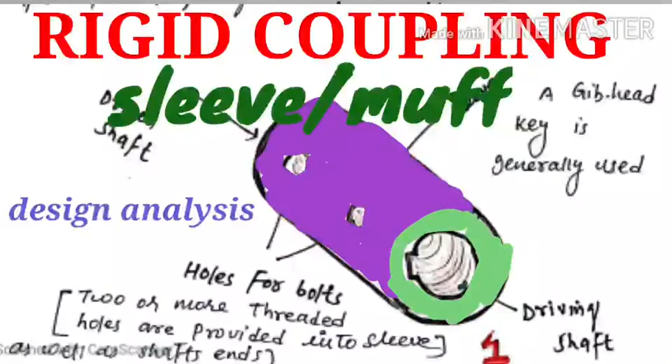Welcome everyone, I am Sanju Ganjir, and today we will learn about rigid coupling and a type of sleeve and muff coupling.

So, continuing, there are three types of rigid coupling.

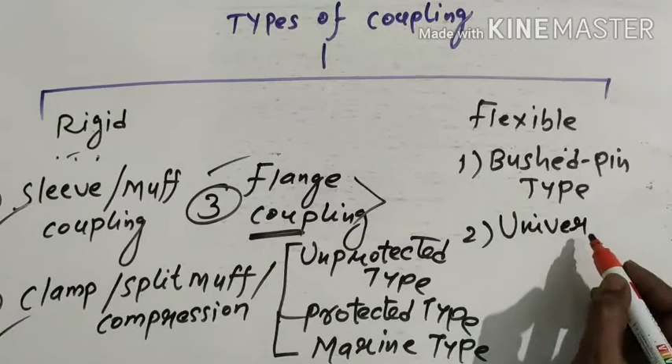You can know about this type of coupling, universal coupling, which connects two shafts that have angular misalignment. This one is very important.

And the third one is Oldham coupling. So all these couplings are discussed here point by point.

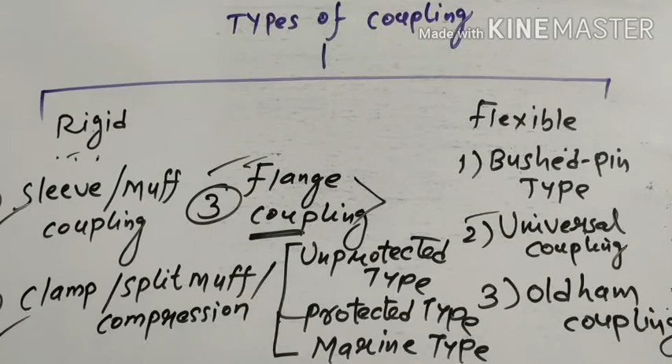So now we first start to discuss the sleeve or muff coupling. Right now we start the discussion of sleeve, or you can say it's a muff coupling. So how does it look? Before starting this, I'll explain it with a diagram. So it looks like this.

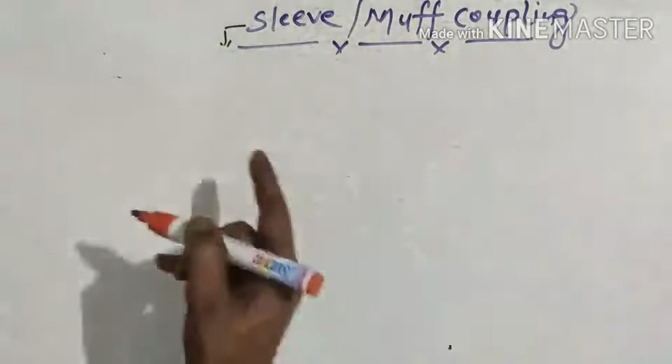Sleeve is nothing but a hollow cylindrical piece of cast iron. It is generally a hollow cylinder or pipe. What is the meaning of sleeve? So first I draw a diagram.

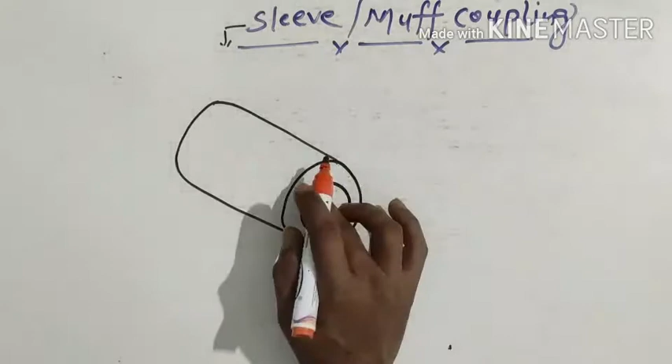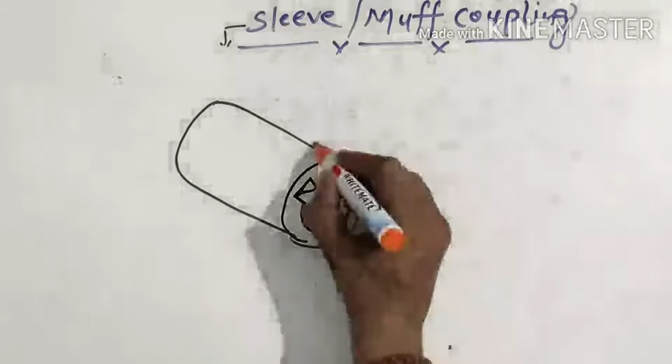Like this. This is a sleeve, and it has an internal diameter which is exactly the same as the diameter of the shaft. It also has a keyway, which is this one. So now this is your sleeve, and the sleeve is nothing but a hollow cylinder or pipe. It is called a muff or sleeve, and it is generally a piece of cast iron.

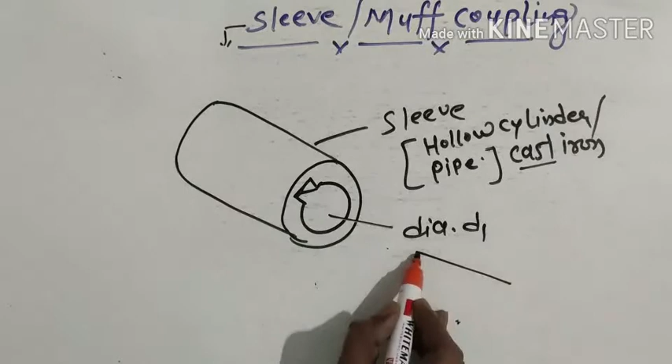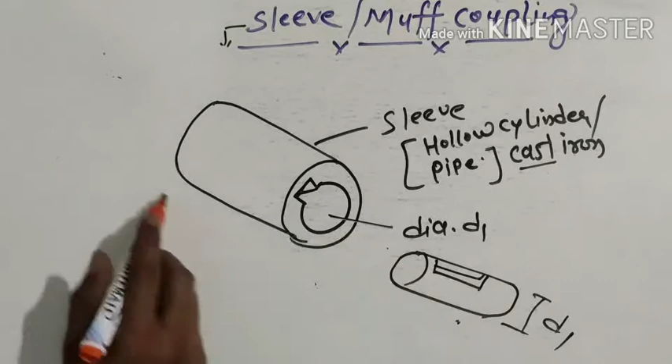So the material used for the construction of the sleeve is cast iron. Now this hollow cylinder has the same diameter, say d1, and if we introduce the shaft like this, then the diameter of the shaft is also d1, and it has a keyway also for this side, so no need to talk more detail about this.

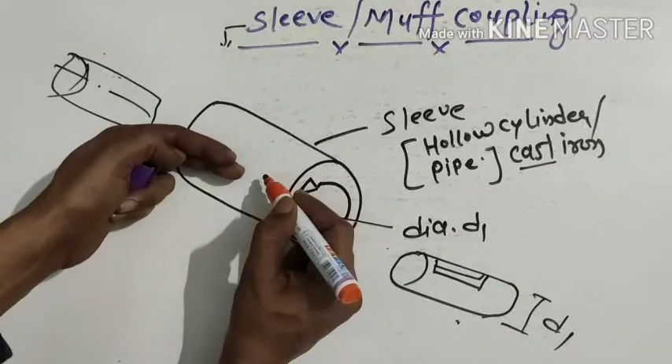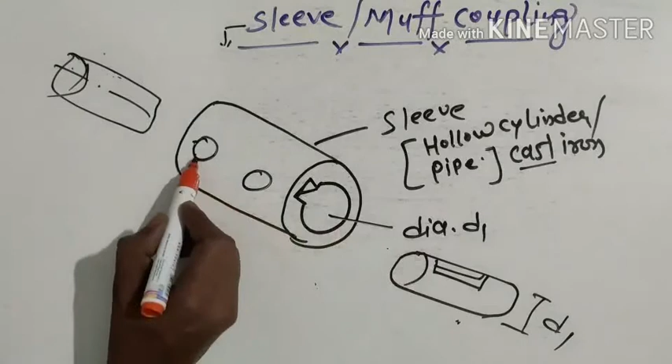Now it fits or inserts here, and it has holes for the bolts, because there should be no looseness between the connection of the shafts. For this reason we provide threaded holes into the sleeve as well as the shaft ends, which helps to tightly fit the shafts together.

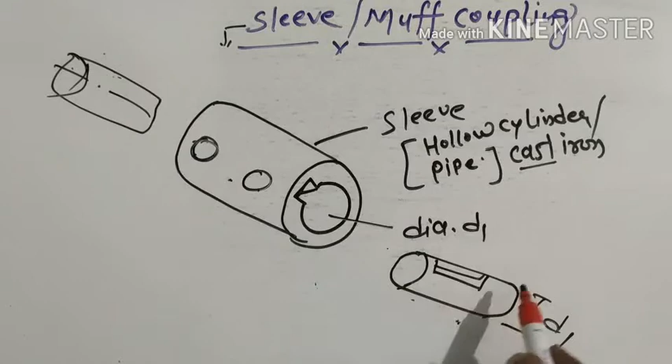One thing to keep in mind when we manufacture the sleeve is that the diameter of the shaft should be such that it perfectly fits into the sleeve. Since many kinds of shafts are available, the sleeve is also easily available in the market, so for ordinary or moderate power or motion transmission, we can use a sleeve. This internal diameter of the hollow sleeve or pipe is exactly the same as that of the shaft.

Generally two or more threaded holes are provided into the sleeve as well as the shaft ends. Now why do we use threaded holes?

We use them because it restricts the longitudinal movement of the shaft and sleeve when the bolts are inserted into them. So some kind of longitudinal movement occurs during this type of coupling, and the threaded holes are provided to prevent that generated longitudinal movement.

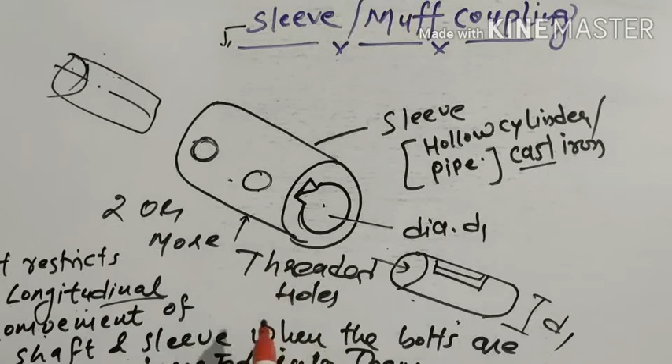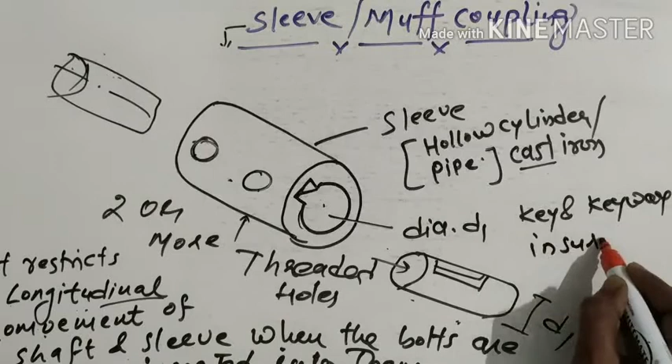And a keyway and key ensure that the shaft and sleeve don't slip. So the key and keyway ensure there is no slip between the shaft and sleeve.

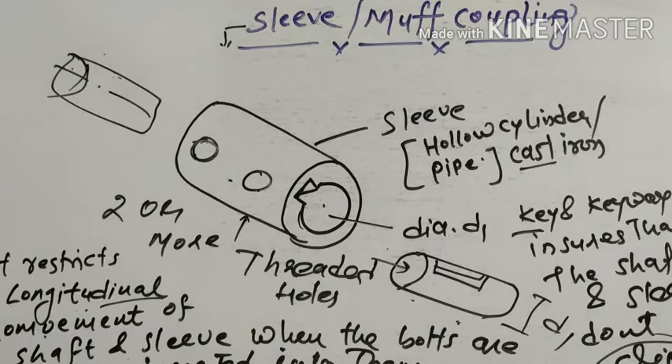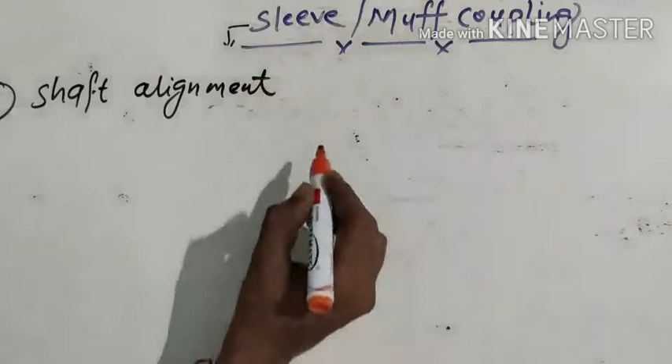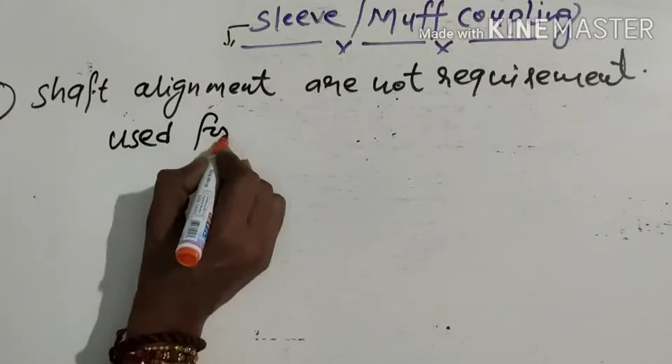Now where are they used? They are widely used where shaft alignment is not required. So this is the application of sleeve and muff coupling, and again it is used for light to medium duty.

Okay, now what is the proportion of sleeve coupling? All the detail is discussed here, so continue with me. I will show you the front view of this arrangement.

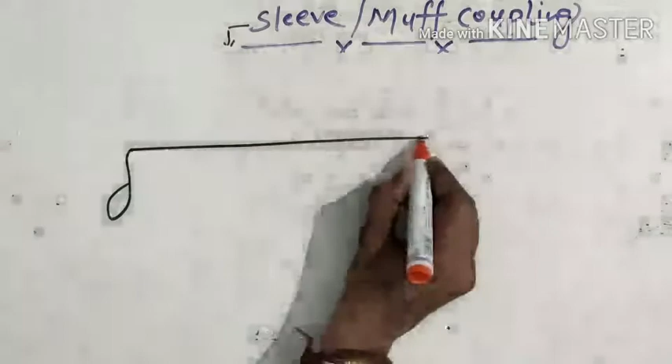So here, suppose this is your shaft, like this, and this one is your center line. Now this is your shaft, and the diameter of the shaft is say d.

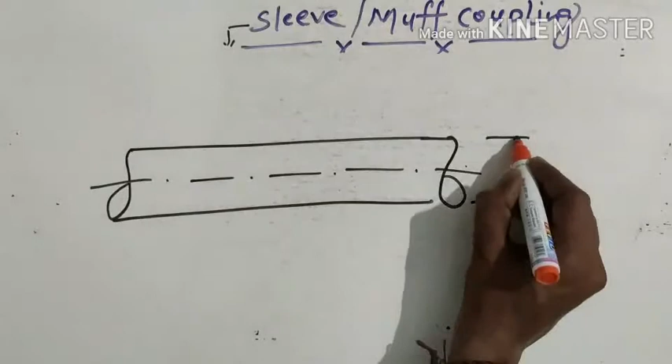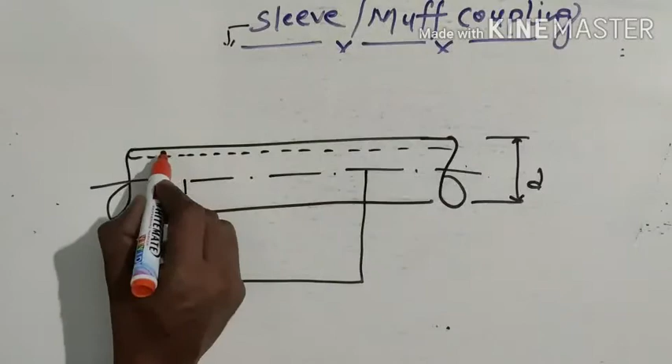Now we have a muff or sleeve. So right now we provide it from here like this, and also we have a keyway, so we use a key, like this is a gib head key.

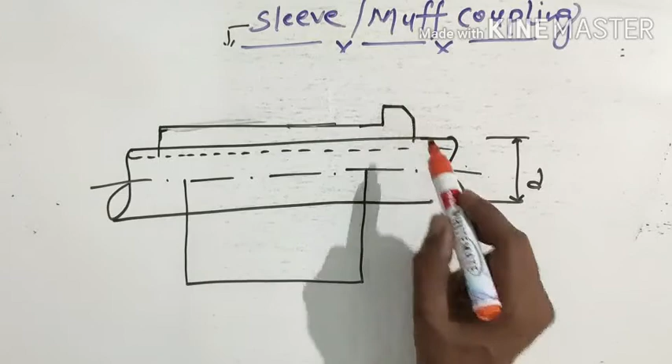This is your gib head key, and all the proportion and application of the gib head key you can learn from the video lecture on keys, which I provide for you in the description. So this is your gib head key.

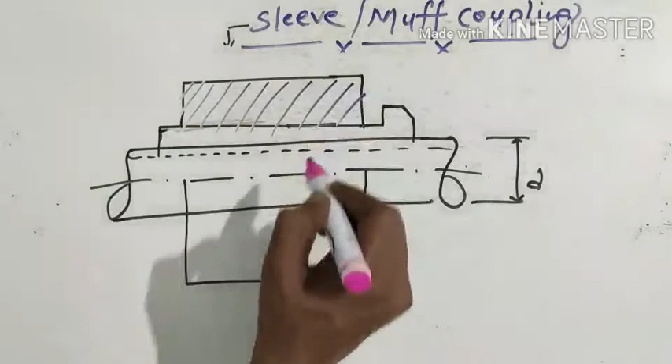Now it fits the muff and shaft. So this is your muff right now, and here I provide a name, I give a name. So this is a muff or sleeve, and the diameter of muff and sleeve are capital D.

And the length, this is your length of the key, that's the length of the muff, length of the sleeve or muff. So this is your length.

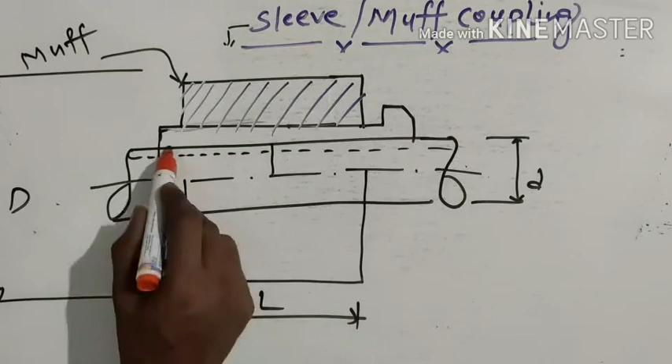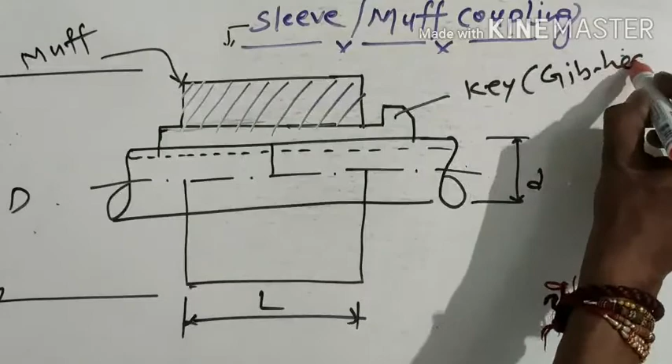And what is the length of key? So this one is your length of key, and it is also equal to the length of sleeve. So L is this is your key, and the name of this key is gib head key. Gib head because it has a head for easy removal of the key inside the shaft.

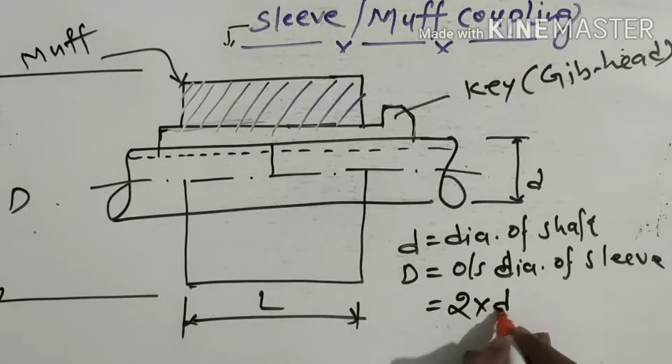So what is the relation, what is the usual proportion of this kind of coupling? Let D be the diameter of the shaft. Capital D is your outside diameter of sleeve, and it is taken as 2 into D plus 13 mm. It is a fixed value for the designing of sleeve.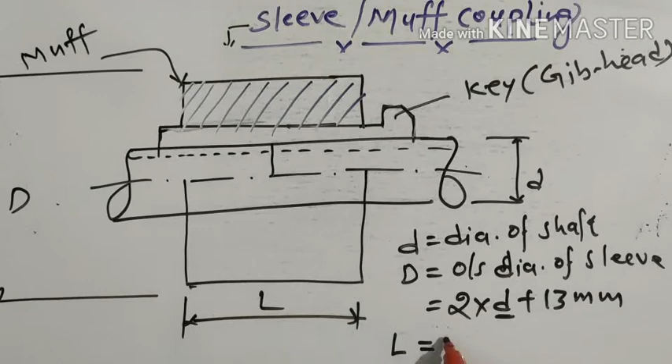And the length of the muff or sleeve is taken as 3.5 into D, the diameter of the shaft.

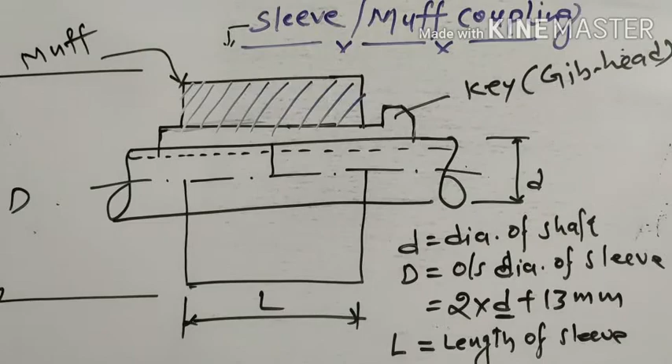Now when we design the sleeve and muff coupling, which type of stresses occur into the shaft and coupling? So we will discuss it here. So now we design the sleeve firstly.

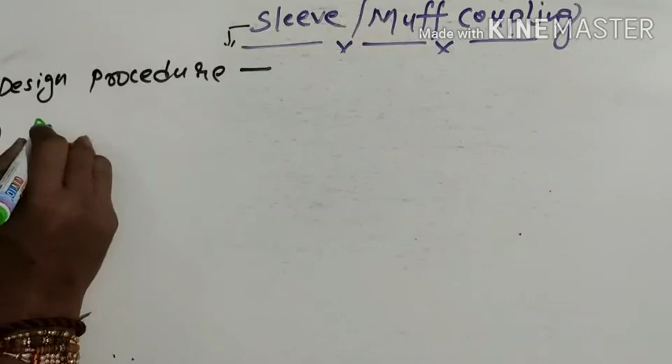So right now the design procedure for sleeve and muff coupling is adopted like this. Number one is design for sleeve. As you know, sleeve is a hollow cylinder or a pipe.

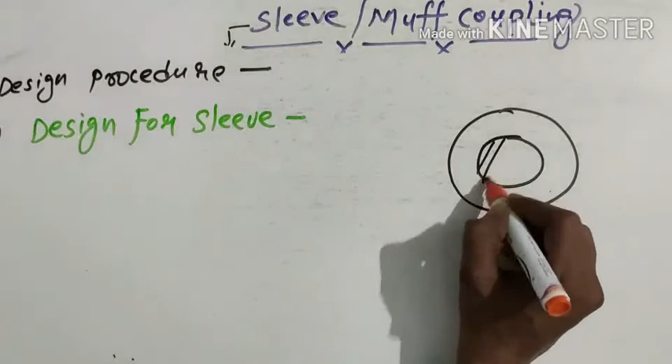So it seems like this. This is the side view. This is the diameter, the shaft diameter, and it is D. And this is the diameter of sleeve or hub. Sleeve, we can say, and it is capital D. So using these two parameters, we design for the parameters of sleeve here.

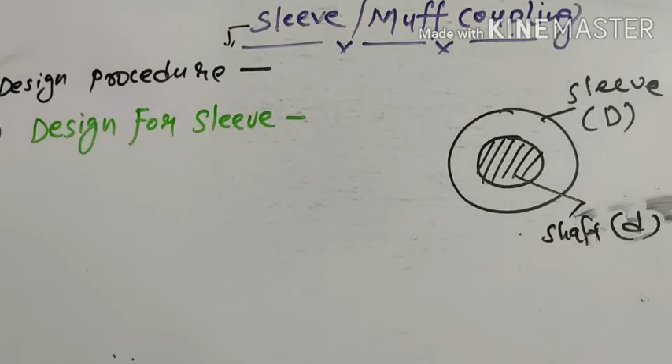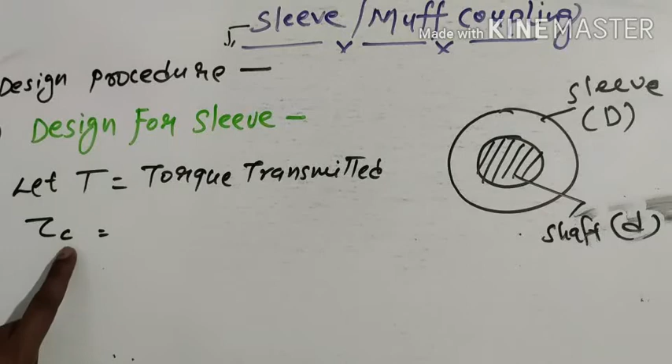So let capital T be equal to torque transmitted. And if the couplings are provided into the shafts and power transmission continues under operation, then some kind of shear stresses occur into the sleeve, and it is tau c. That means the sleeve is made of cast iron, so this is your permissible shear stress.

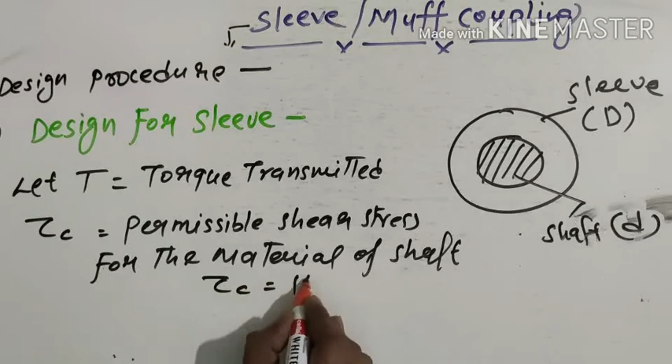For the material of shafts, the permissible shear stress is maximum 14 megapascal.

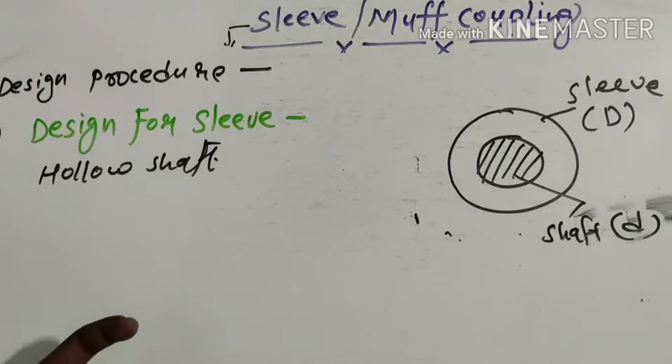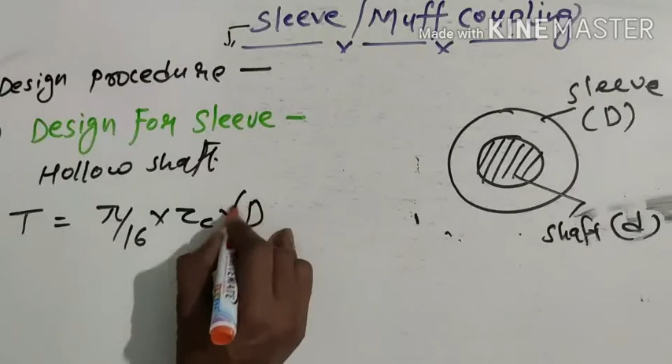Now for the hollow shaft, power transmission is given by - this is already discussed in the lecture on shafts, so you can easily learn from there, I provide the link again for you. So for the hollow shaft, power transmission is given by capital T equals pi by 16 into tau c into D power 4 minus small d power 4 upon capital D, where D is the outside diameter of sleeve, and small d is the diameter of shaft.

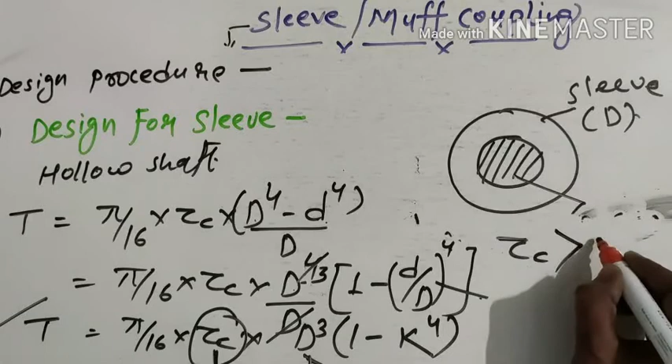Okay, so using this equation we check the value of induced shear stress tau c. Let we check the value of tau c. So from using this equation we need to check the value of tau c, and if the value of tau c is greater than the permissible value which is given in the question, tau c permissible, then our design for sleeve is fail.

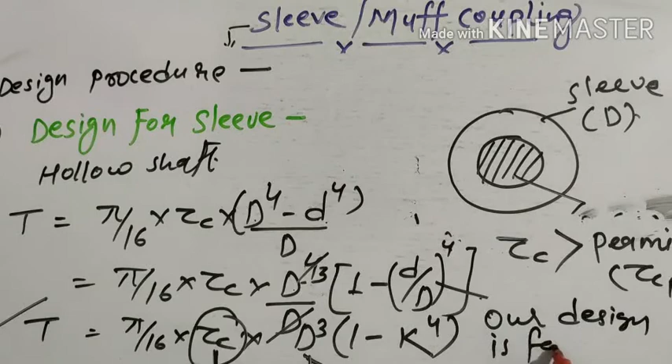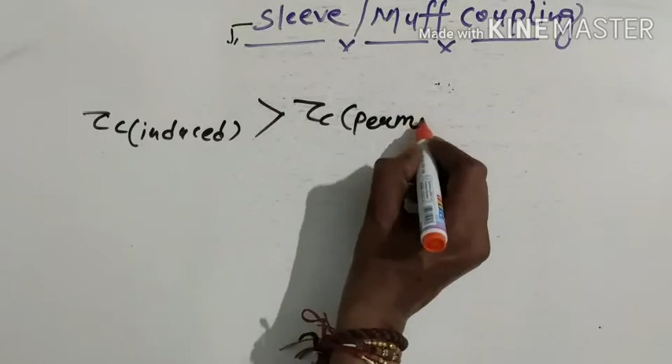So what next? When tau c, that means induced shear stress, is greater than the permissible value, then failure occurs, and the value of diameter of the sleeve, that is D, is not safe. If not safe, we need to increase the value of D. And if it is less than this, then it is safe, no need to check it at all.

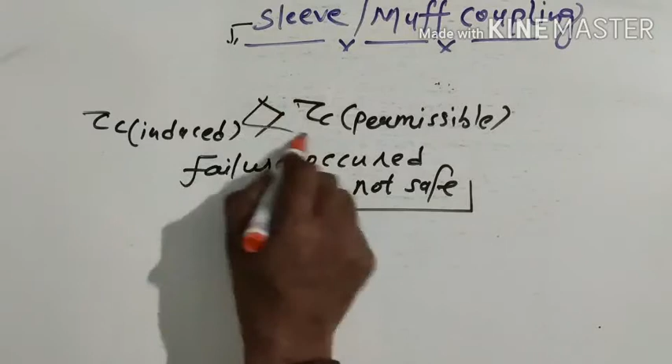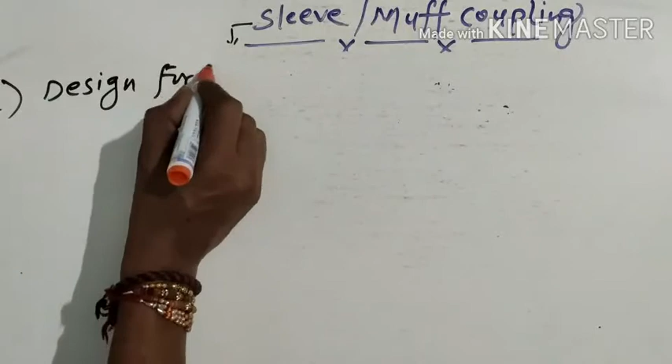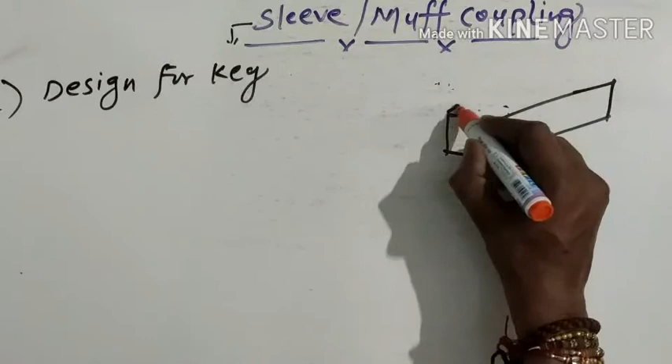So now the next design consideration is design for key. So it is depend upon the types of key what we use. So I discuss it with the diagram. Let's start with the diagram. So we have a key like this.

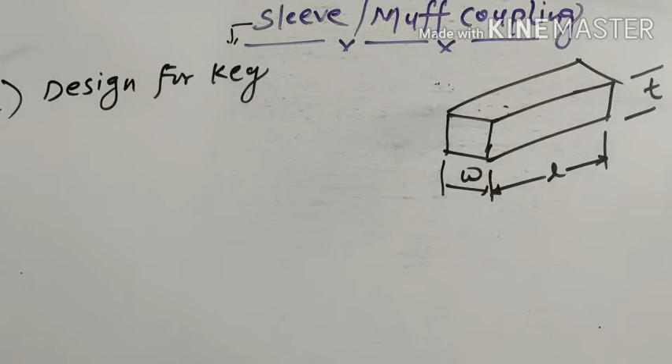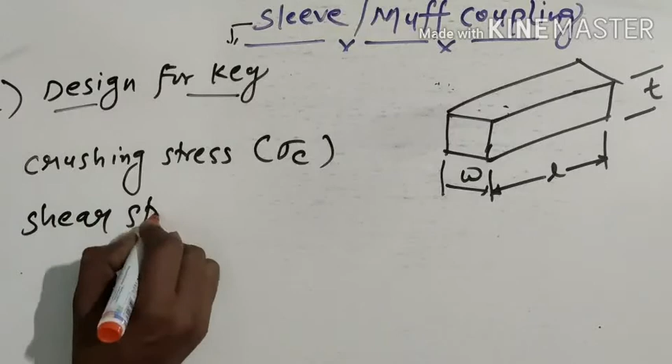This is the length of key, represented as small l, this is the thickness of the key, and this one is the width. Now the parameters or the proportion of the key, whether safe or not, can be checked here. What is the procedure? It is most desirable to select a key that has some crushing stress, that is sigma c, and some shear stress, that is tau. So by using two equations we can check the value of sigma c and tau.

So it is very simple. From the section of key, from the lecture where I tell a lot of detail about the key, you can easily learn the crushing stress and the shear stress. So here no need to talk more about this.

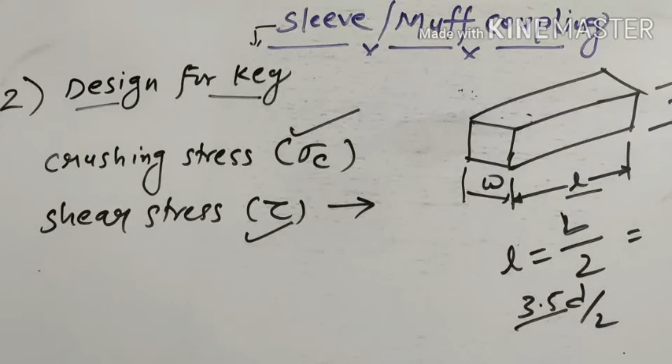So as we know, there is two key used, one for a shaft, the driving shaft, and one for the driven shaft. So the total, one half of the shaft, the length of the key is L by 2, that is 3.5 into D by 2. Remember it, 3.5 D by 2, because the value of the length of the key is 3.5 into D for the sleeve coupling. And now we can say that the key here seems like a rectangular key, so it is a rectangular key.

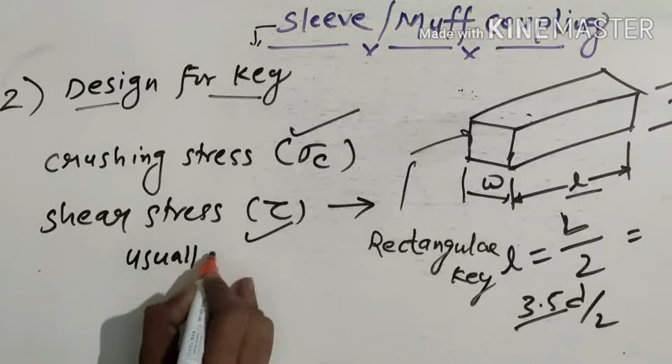So the usual proportion for rectangular key is: the width of the key is taken as D by 4, remember, and the thickness of the key is taken as D by 6, and that is equal to 2W by 3. So put the value of W here, you have the value like D by 6. So this is the value of width and thickness.

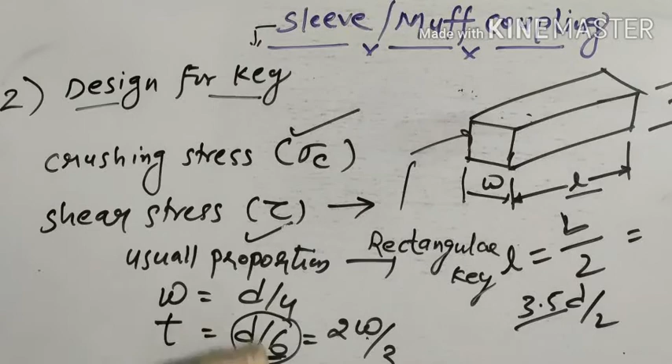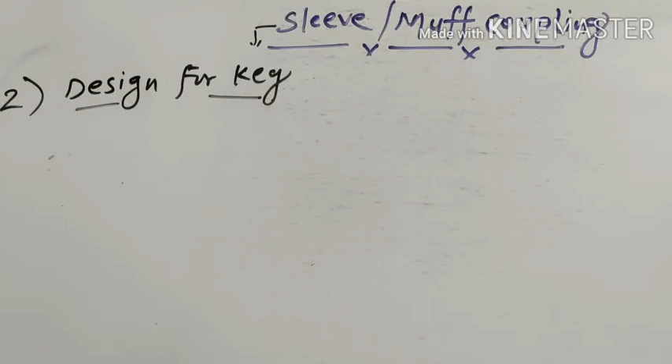Now we need to check the value of sigma c and tau, and what is the expression, what is the equation for this kind of stresses. The next one is considering, as already told, there are two kinds of stresses that occur: one is crushing stress and the second is shearing stress. Now let's consider the shearing of key.

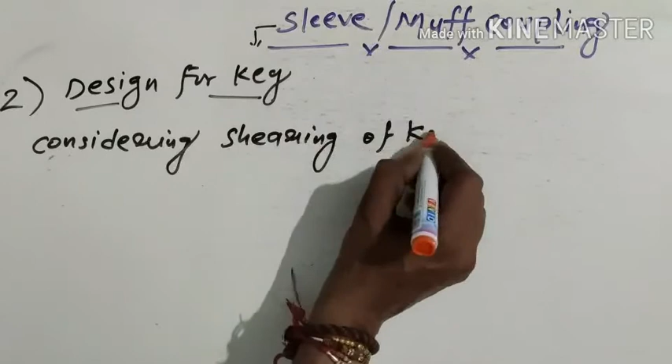Considering shearing of key, and the equation for this is: torque transmission T is given by length into W into tau into small d by 2. That expression is completely discussed in the article of key. So this is the equation, and from here we can check the value of tau.

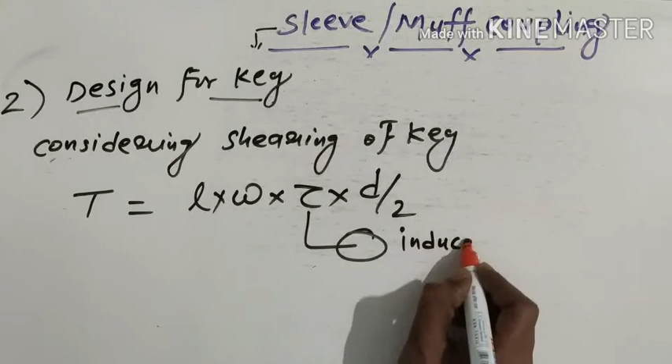So from this equation we check the value of induced shear stress, and if it is greater than the permissible value of shear stress, then failure occurs. Remember, it is most important. Failure occurs, then we need to change the dimension of key. Right now we need to change the dimension of key and again check the value of tau. Okay, if the failure occurs, then what we do next?

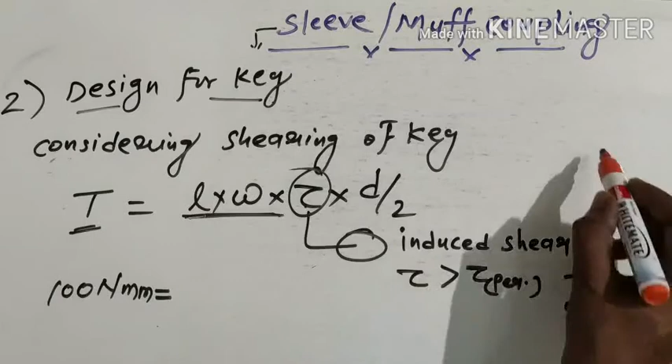Putting the value of the permissible shear stress here, just I discuss it with a short example. If we have the value of T as 100 Newton mm, and if the length is given, because we have a diameter D, so from 3.5 into D by 2, this equation we have the value of length. Suppose this is about 50 mm.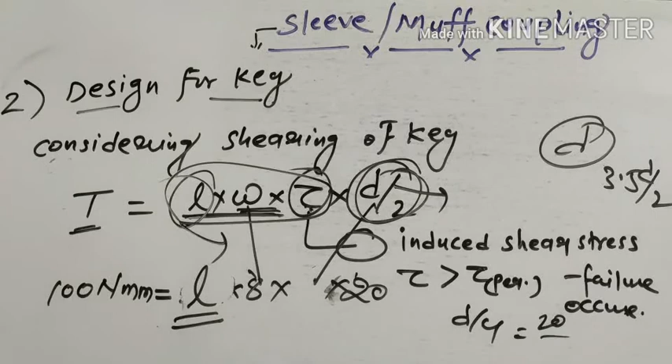Okay, so this situation is applied where if the failure occurs. It can already be discussed on a numerical problem. So next one is considering crushing of key. Considering crushing of a key.

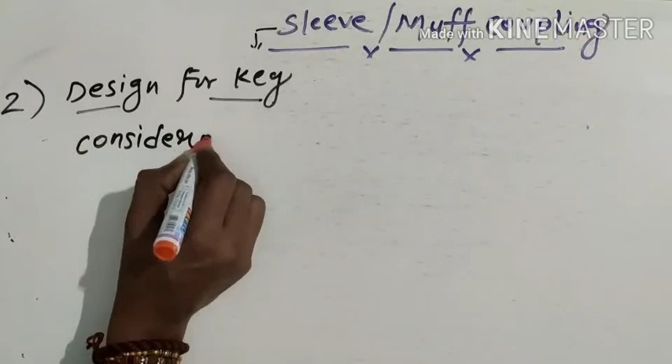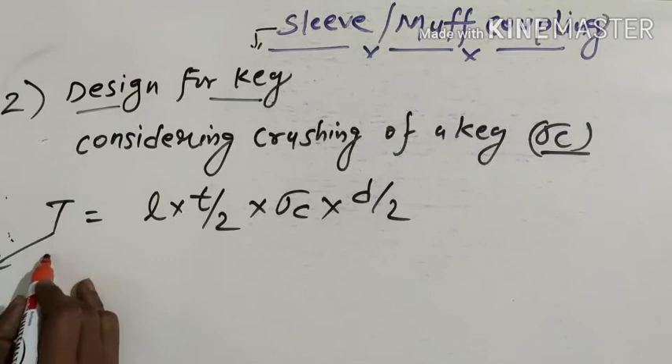So that means sigma c is introduced here. So the torque transfer is given by small l into t by 2 into sigma c into d by 2. From this equation we have t in the question, okay, given, or if not given, then we also have the known value of power, say 20 kilowatt or other. So from the equation of 60 into p by 2 pi n, we find the t, okay, and all the values are easily known.

So find sigma c, and also have the criteria: if the induced value of the crushing stress is higher than the permissible value, then also failure occurs. Then we need to check the dimension of key or shaft. Okay, so this is a complete detail about the sleeve and muff coupling.

One more thing is that why we take the key into two parts. Why? So I'm telling you here. The depth, most important sentence is here.

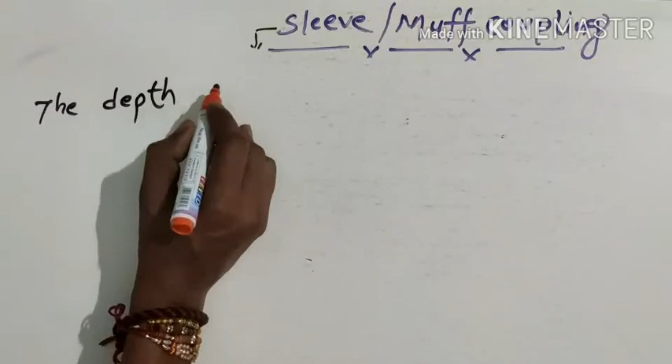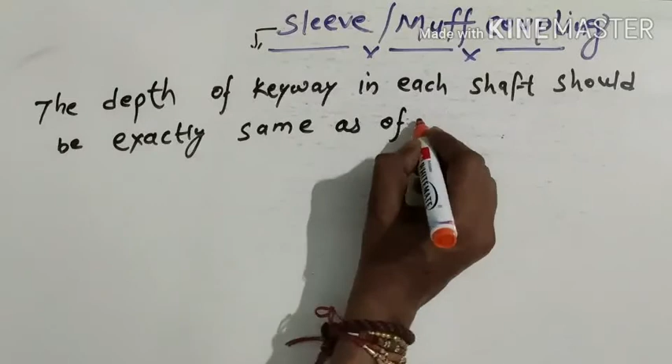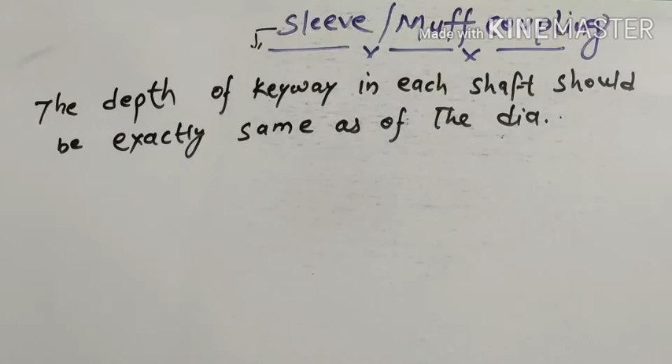The depth of the keyway in each shaft should be exactly same as of the diameter of sleeve. Okay, and if this condition is not satisfied, the depth of keyway in each shaft should be exactly same as of the diameter of sleeve or the other shaft.

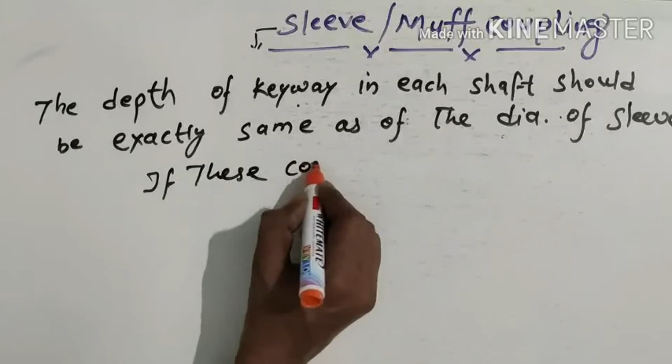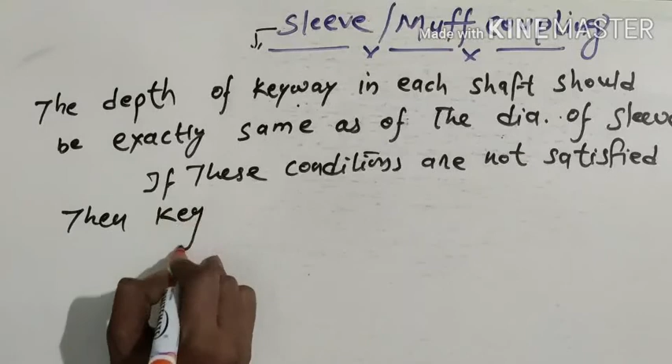Okay, and if these conditions are not satisfied, then the key will be bedded. This is a defect, okay, or some kind of failure. So key will be bedded on one shaft, and it will be loose in the other.

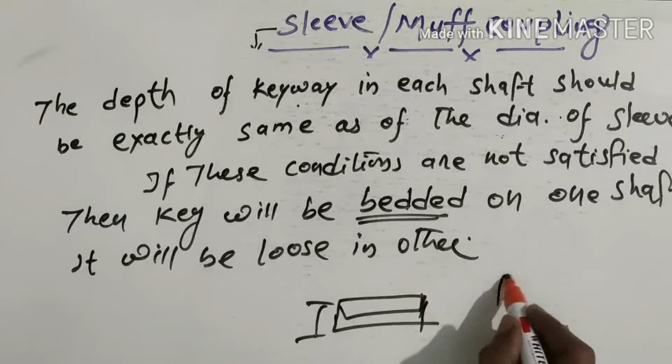So once if the depth like this is like a keyway, and this is the depth, so it is also about t by 2, that is the half of the thickness, and this is exactly same for both the shaft or for the sleeve. And if these criteria are not matched, then the key will be bedded on one shaft, or you can say much more tight on that shaft, which affects the shaft. Okay, and to the other shaft it will be loose.

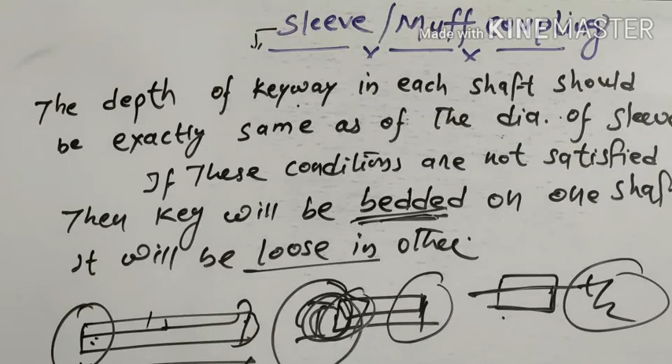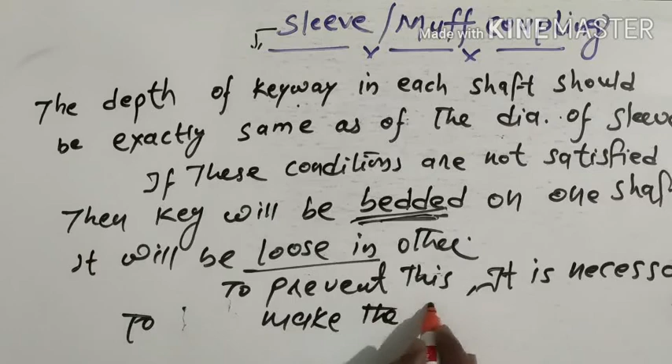Okay, so because if we have a single key which joins both the shaft, which connects both the shaft, then it will suffer this kind of failure, that is bedded on one side and loose on the other side. So to prevent this, it is necessary to make the key into two parts.

Okay, so that is the reason for designing the key into two separate parts. So this is the complete detail about the sleeve and muff coupling, and shortly the detail about the coupling.